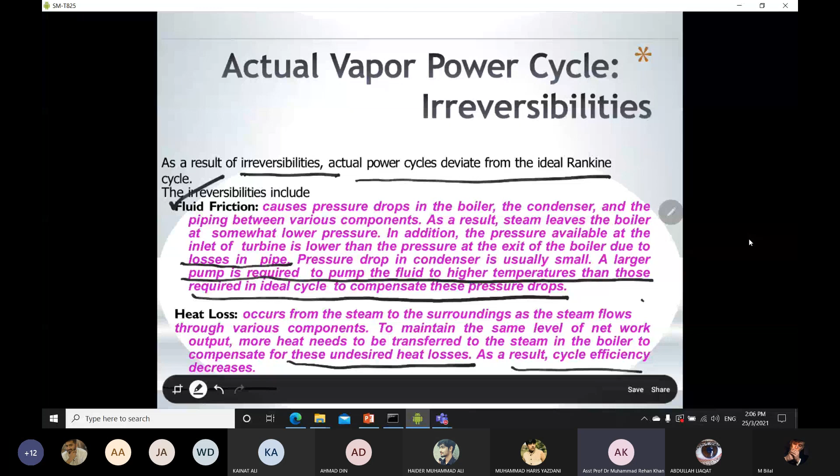Then there will be heat loss, occurring from the steam to the surroundings. Definitely if there is heat transfer, there will be losses to the surroundings for the actual system through various components. To maintain the same level of net work output, more heat needs to be transferred to the steam in the boiler to compensate for these undesired heat losses. As a result, cycle efficiency decreases. So for your actual vapor power cycle, the efficiency will be less compared to the ideal one.

Coming towards our T-S diagram for the actual one. Previously we know how the ideal case looks, I will draw it in blue line. For the actual one, notice this line, the continuous line, this is your actual one. So the actual vapor power cycle looks like this, as we already saw in previous lectures.

This is your ideal Rankine cycle, highlighted in blue. In your actual vapor power cycle, there will be a deviation from point 1 to 2, an increase in entropy, because this point, which was previously at 2, just shifted towards the right side. Then there will be a pressure drop in the boiler, so this point on the continuous line will be shifted from this to this dotted area, which represents your pressure drop.

Because there will be a decrease in pressure in the boiler, there will also be irreversibility in the turbine, so again there will be an increase in entropy value. The point which was previously at this state in the ideal case is now shifted towards 4 dash, so you can call it 4 dash. This is due to the irreversibility in the turbine, and that increase in entropy will always be seen at the exit of your turbine or exit of your pump. That's why point 3 does not change in either the ideal or the actual case.

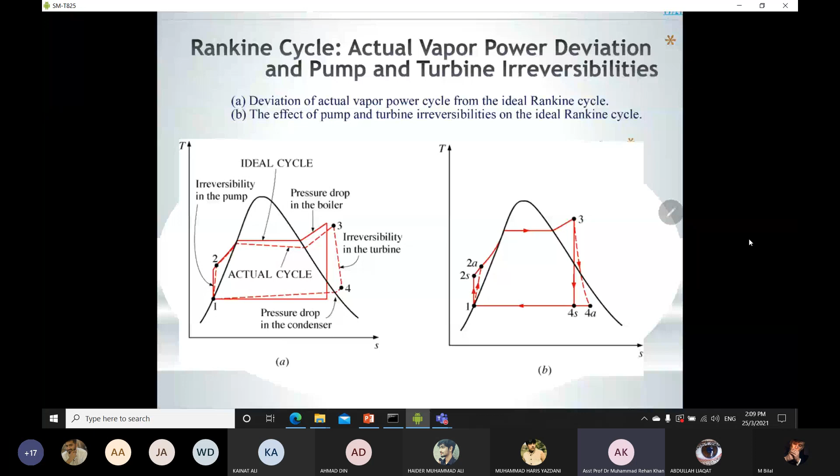Now coming towards this, we already talked about that there are two causes, which are your fluid friction or heat losses to surrounding, as the two common sources of irreversibilities in your actual turbine, actual vapor power cycle.

Now coming towards this, whenever there is an involvement of irreversibilities, these are to be seen in your pump, where you are supplying some work, and in your turbine as well. So whenever these things are involved, you have to define some efficiency of your pump in terms of your isentropic work. You already know we have to divide isentropic work over actual work.

So this term will be, because in the case of your pump, this is pump one, ws is lower. Because when there is an isentropic process, it means you have to supply minimum work to your pump. But when there is actual work, because of irreversibility, you have to supply maximum work to your pump. So the above term is lower, and the denominator term is the maximum one.

You already know that work is defined as enthalpy at exit minus enthalpy at inlet. So h2s, this is the isentropic one, h2s minus h1. And then actual work, one is your inlet, 2a is your exit, so h2a minus h1, this term will be defined.

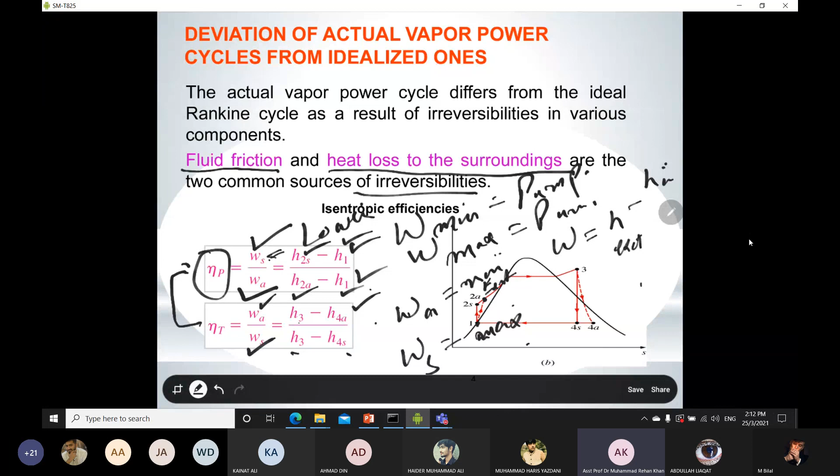So in order to define the work done in the form of enthalpies, again you have to know from your energy analysis in the previous lecture that h3 minus h4a. This term will be defined for the actual one, and then h3 minus h4s is the isentropic one, work done for your isentropic turbine. So this is how we can define the isentropic efficiency of your pump and turbine for your actual vapor power cycle.

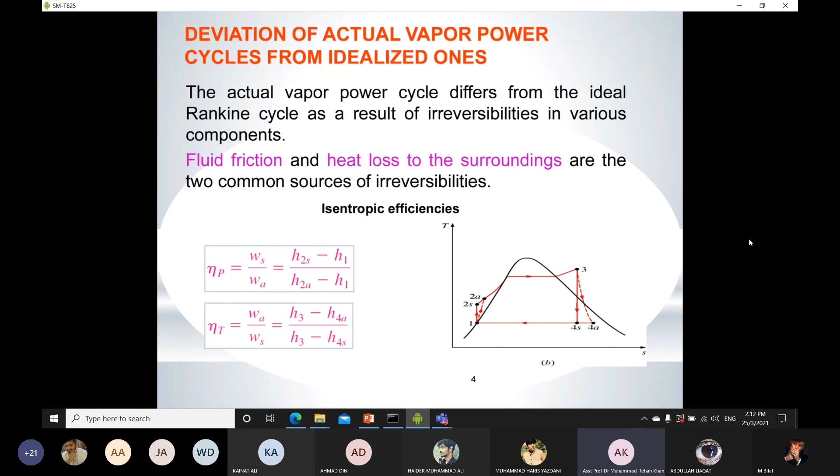So we will practice one question as well, so then you can easily understand how to apply these equations on your vapor power cycle, which is working on the actual one. Now coming towards the question.

Okay, let's read the question. Consider a 210 megawatt steam power plant that operates on a non-ideal Rankine cycle. This means it's defined as non-ideal, so this is the actual vapor power cycle. Steam enters a turbine at 10 megapascal and 500 degrees Celsius.

This means point number three is known to you: pressure is 10 megapascal and temperature is 500 degrees Celsius, and it is cooled in the condenser at a pressure of 10 kilopascal. This pressure is known to you as well, that is 10 kilopascal.

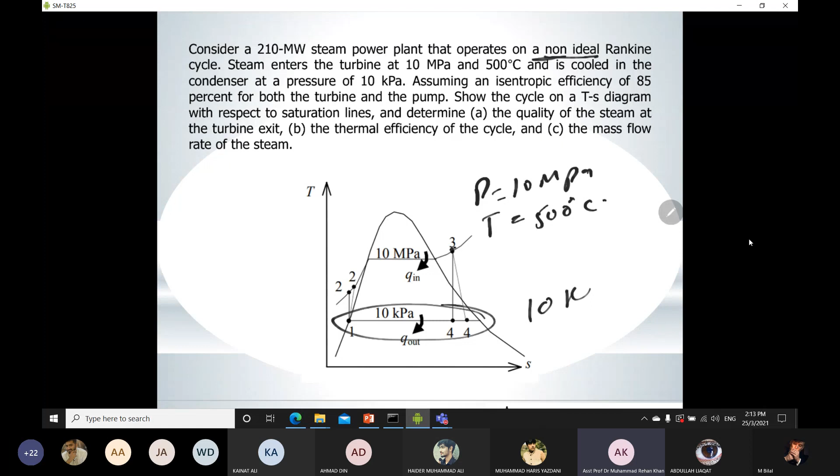Assuming an isentropic efficiency of 85% for both the turbine and the pump, the isentropic efficiency of the pump is given to you, and the isentropic efficiency of turbine is also given because it is mentioned as the same. So both are 85%, as mentioned in the question.

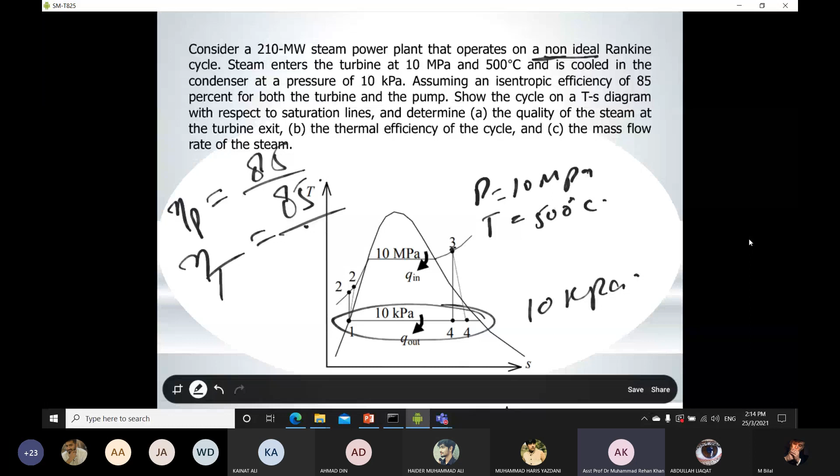Show the cycle on the TS diagram - it is already shown. And determine the quality of the steam at the turbine exit, the thermal efficiency of the cycle, and the mass flow rate of the steam. Now we will see how we can solve it.

Starting from state one, we already know that the pressure is 10 kilopascal, so we can go to the thermodynamics table. I hope all of you know how to find these values using the thermodynamics table, so I'm not going to repeat it. This will be from your saturated liquid one.

For W pump in, the difference from the previous question is that here you have to find the actual work for your pump, whereas previously you found the isentropic work. The equation is the same, specific volume into P2 minus P1, but here you have to divide by the isentropic efficiency of your pump.

This specific volume value comes from your state one. This is given in your question, this is given in your question, and this is also given. So by just plugging in all the values you can find the actual work for your pump, whereas previously we were finding the isentropic work.

Now we have to find the actual enthalpy at the state number - since this is 2s and this is 2a, we define this as 2a, h2a. So h2a is equal to h1 plus the actual pump work.

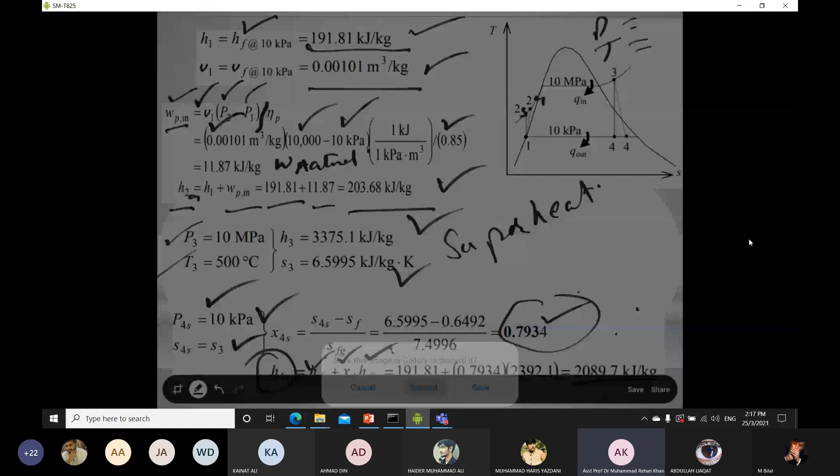Now coming toward H4A - how do we find this? We have to find both 4A and 4S. 4A we find from the isentropic efficiency of the turbine, given by the relation H3 minus H4 actual, divided by H3 minus H4S. H4A we have to find, H3 we already found previously.

H3 is given in your question, which you already found from the previous state. H4S you just found in the previous condition for the isentropic one. Now all values are given, so just plug them in and you will get the actual enthalpy value for state number 4.

Now coming towards the quality - for the quality again you have to use state number 4, but here you have to use the actual enthalpy value.

Okay, so again use this H4 which is your actual one. HF you can easily find out from your 10 kilopascal range. HFG is also given from your 10 kilopascal from your pressure table. So you can find the quality of your

steam here. Now coming towards the efficiency, we already know we need Q in, Q out. For Q in, H3 minus H2. Here H2, previously when we are dealing with the ideal one, we have to use H2S, which is your isentropic enthalpy.

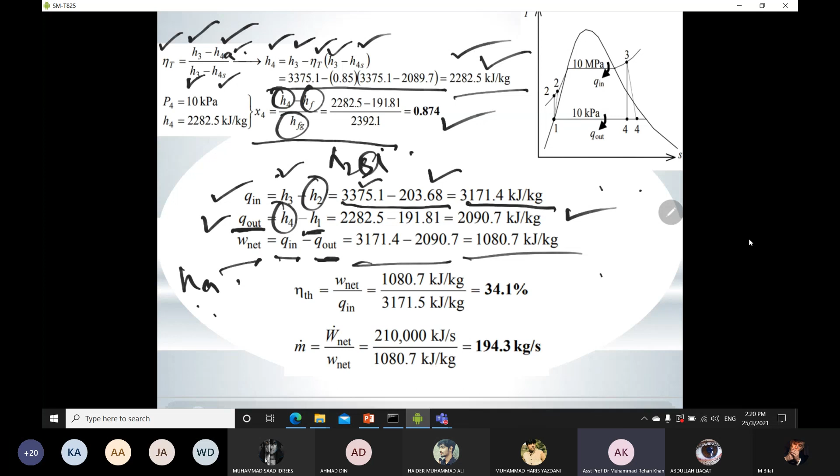Now we need W net, which is your W for your cycle. Put in all the values and then you can find the W net as well. Efficiency of the turbine, efficiency of your whole cycle is given by W net over Q in. Plug in all the values, you can easily find the efficiency as you have already done in your ideal case by using the same procedure.

Again you need a mass flow rate. This is your power which is given in your question, that it is a 210 megawatt power plant. And W net you already found in this area. Then you can easily find the mass flow rate as well. So this is how you can deal with your actual vapor power cycle by using your actual enthalpies and your isentropic enthalpy values.

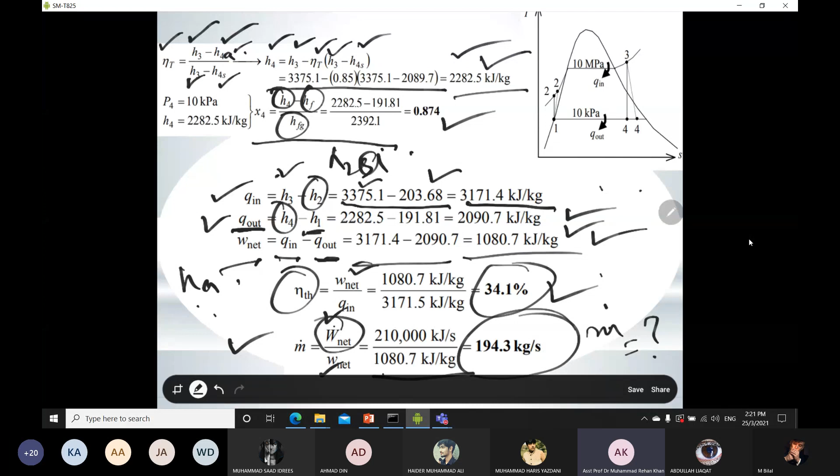Okay, so now coming towards the next question. This is example 10-2. If you can read it: a steam power plant operates on the cycle which is shown in figure 10-5, which is available in your book.

If the isentropic efficiency, here again the same thing which one student is asking before, that the isentropic efficiency of the turbine and the isentropic efficiency of the pump in this case is different, so we have to put two different values. Previously we were just mentioning that it was same in the problem statement, so we used the same value. In this case we have to use different values for each.

So first thing, the thermal efficiency of the cycle, again using the same procedure, the net power output of the plant for a mass flow rate of 15 kilogram per second. This is your reading assignment, you have to do by yourself after the class or anytime when you are free. So you have to read it by yourself.

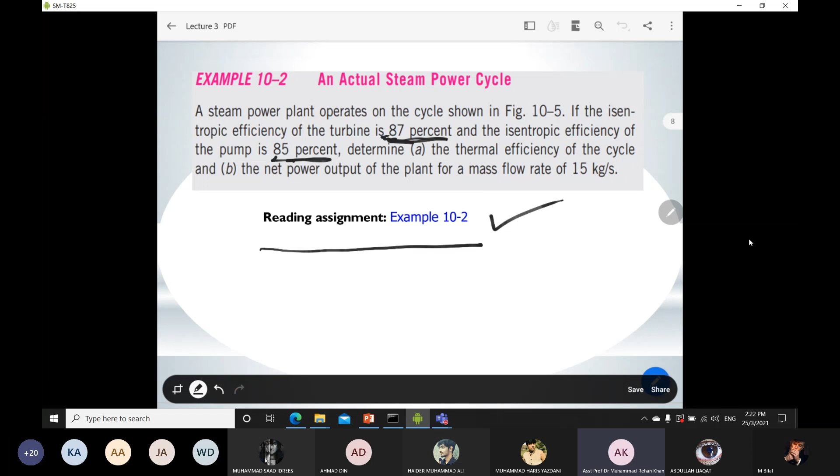Coming towards another important topic, because the main objective of this course is to increase the efficiency of your thermodynamic cycle. All the effort we are doing to find the enthalpies, to convert the actual vapor power cycle into the ideal one, is happening because we need maximum efficiency or maximum work output from our turbine. So we will see how we can achieve the maximum work from your turbine and how we can increase the efficiency by different ways.

As we already know, when we are talking about the TS diagram, the work for your cycle is this area under the curve. So in order to increase the work output for your cycle, W cycle, what we need to do is increase this area.

How can we increase this area? If we notice that this point 2 or this point 3, we just shift this point to the lower side, in this way we get this added area. This W added, which is your added area, increases the work done for your cycle. So this is one approach: either we can decrease the pressure of your condenser, and easily get the maximum work for your cycle.

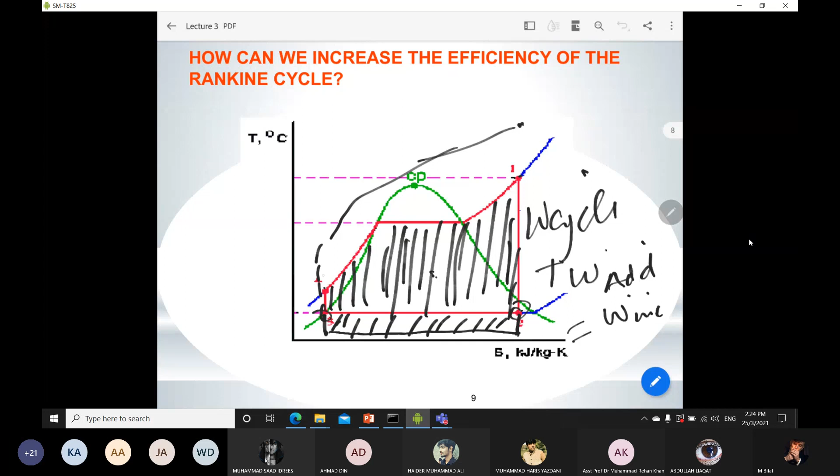Then the second approach is that either we can just shift this point one to this area. This again you can easily get some added part. So this is another approach. We will see in detail how these approaches will work.

The idea behind all the modifications to increase the thermal efficiency of the power cycle is the same: to increase the average temperature at which heat is transferred to the working fluid in the boiler, or decrease the average temperature at which heat is rejected from the working fluid in the condenser.

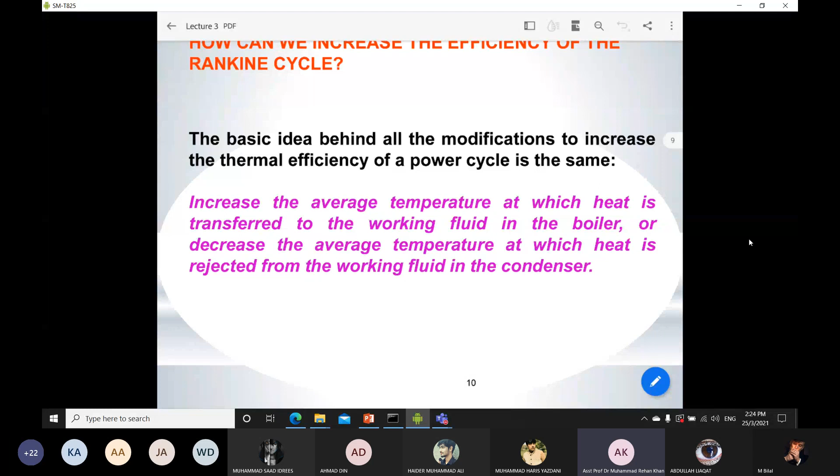Now the first approach, lowering the condenser pressure, which we already discussed, is that we need to increase the area under the curve. Previously, if this is your W cycle, now we just have to add to it by lowering this point 4 to 4 dash. Once we decrease this pressure, which is your condenser pressure, we get this added area.

So to take advantage of the increased efficiency at lower pressure, the condenser of the steam power plant usually operates well below the atmospheric pressure. There is a lower limit to this pressure depending on the temperature of the cooling medium.

But there is a side effect to this: because at the same time we are getting maximum work for our cycle, lowering the condenser pressure increases the moisture content, which is not desirable for our turbine. Once the moisture content is increased at the exit of the turbine, it means erosion and corrosion will be maximum, and we do not want our turbine lifespan affected by increasing moisture content. So this is not a desirable thing, we will see another way.

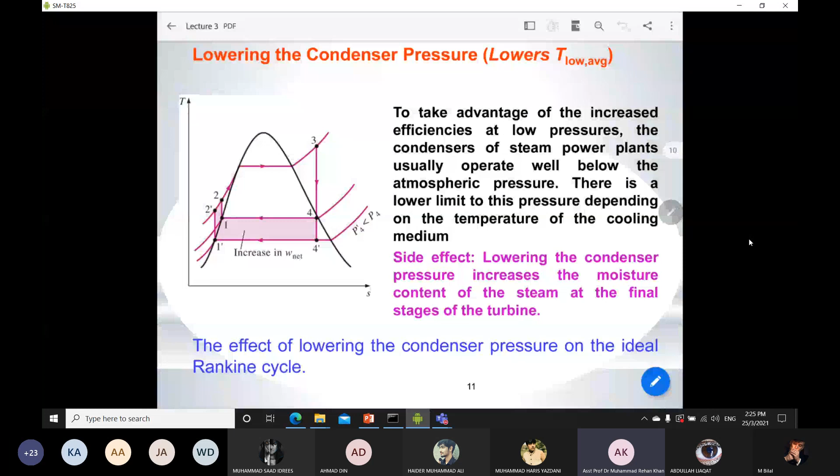The next way is superheating the steam to high temperature. First we will see what is meant by superheating of the steam.

Superheating means that previously this is your superheated region, previously the superheating is at point 3. Now we just shift to 3 dash, meaning we are superheating the steam at higher pressure and higher temperature. So now this will be the added area, and this is your W cycle previous one, and this is your W added. It means your cycle efficiency will be increased, because we have to add this up.

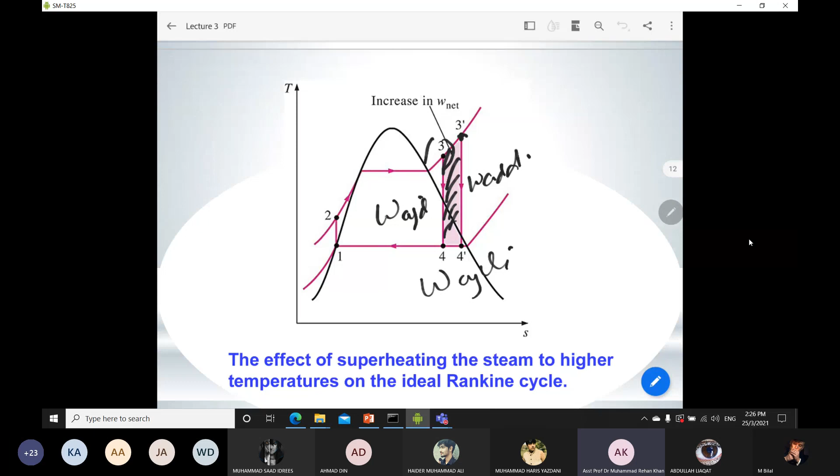Now coming towards another point: both the net work and heat input increase as a result of superheating the steam to a higher temperature. In turn, the overall effect is an increase in thermal efficiency, since the average temperature at which heat is added increases.

Also, superheating to a higher temperature decreases the moisture content of the steam at the turbine exit, which is desirable. So this is the positive thing about superheating.

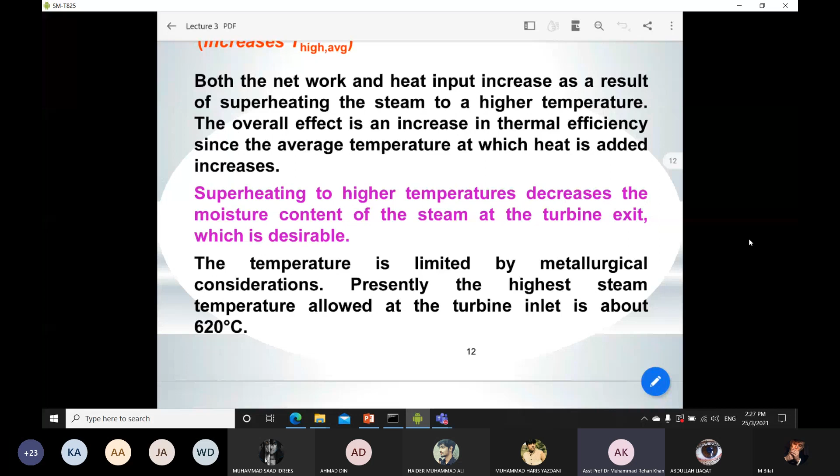Another thing is that temperature is limited by metallurgical considerations, because for example our turbine blade is made up of some sort of metal which cannot withstand that superheating temperature. So that's why we have to consider the metallurgical approach as well. Presently, the highest steam temperature allowed at the turbine inlet is about 620 degrees Celsius.

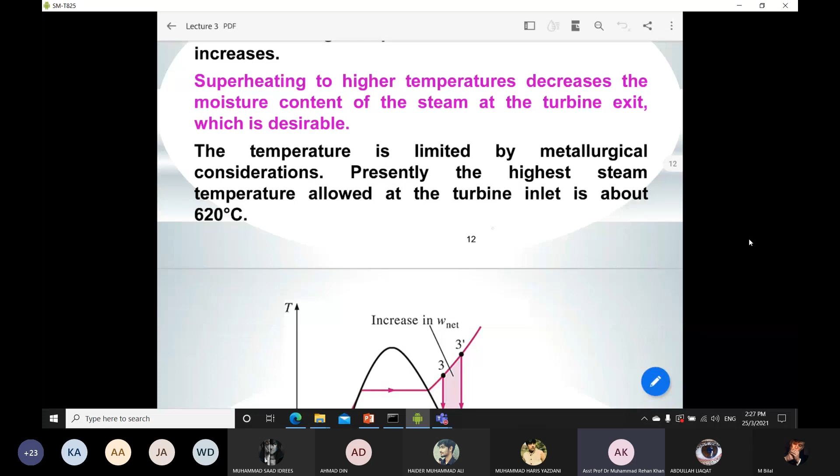So these are the operating temperatures for our turbine which we presently use in our steam power plants.

Now coming towards the third approach, which is increasing the boiler pressure. If we increase the boiler pressure, another important thing is that T maximum, which is your superheating temperature, we have to keep the same. So T maximum stays the same, but when we increase the boiler pressure, it means the boiling point of your working fluid is also increased, so we need more work input and more heat Q in the boiler.

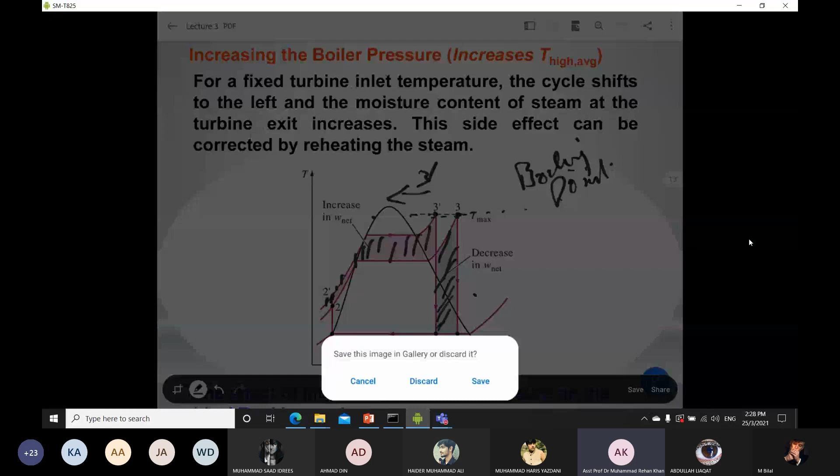So in this way, what we have to do is we get this added area by increasing the boiler pressure, but at the same time point 3, which was previously at the right side, now shifts towards the left, to point 3 dash. This means we see a decrease in W net, but this decrease is small compared to the increase, so we still get the maximum efficiency out of it. This is another approach to get maximum efficiency or maximum power from the cycle.

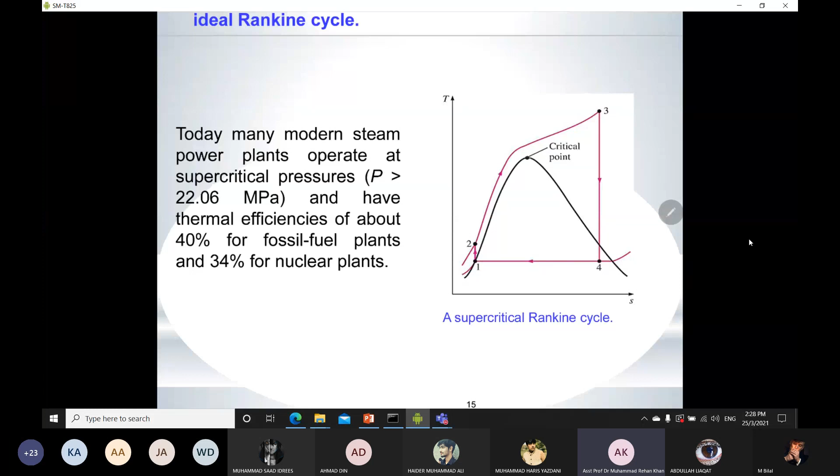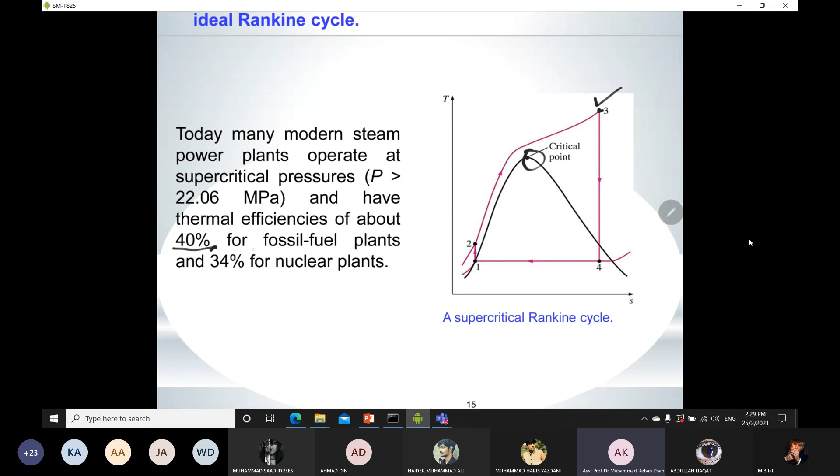Now coming to another point: many steam power plants today operate at supercritical pressure. Supercritical pressure means operating above this critical point. So today, in the operation of vapor power cycles, we use the supercritical pressure, meaning point 3 is above this critical point, at a value of 22.06 megapascal, giving a thermal efficiency of 40% for fossil fuel plants and 34% for nuclear plants. This is another important piece of information for you.

Now coming towards the question, we just apply these approaches. There were three approaches: either we increase the boiler pressure, decrease the condenser pressure, or use superheated steam by increasing the temperature of the superheating steam. So let's see how each affects the thermal efficiency.

Let's read the question first. Consider a steam power plant operating on the ideal Rankine cycle. Steam enters the turbine at 3 megapascal and 350 degrees Celsius, and is condensed in the condenser at a pressure of 10 kilopascal. So this pressure and this temperature are known to us. This is similar to your example 10-1, so we also have to compare the efficiency values from example 10-1, because in that example it was 75 kilopascal, while here it is 10 kilopascal. This means we are lowering the condenser pressure in this case.

So we will see, if we compare the efficiency, whether it is similar, higher, or lower with this approach. Let's see what happens. So, determine the thermal efficiency of this power plant.

For case A, you have to find the thermal efficiency. For case B, find the thermal efficiency if the steam is superheated to 600 degrees Celsius. Previously we were superheating the steam at 350 degrees Celsius, and now we have to raise the temperature to 600 degrees Celsius.

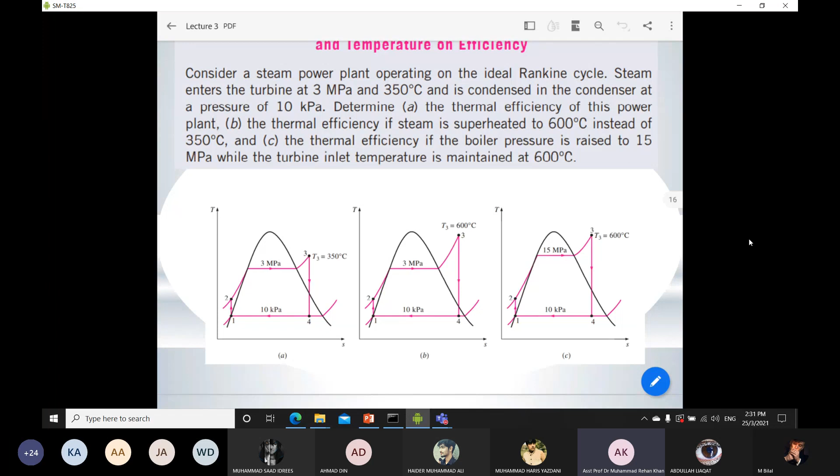Okay, so now we will see the solution.

Okay, so for state 1, which is your first case, you already know the pressure at state 1, which is similar to your condenser pressure, which is 10 kilopascal. And we already know how to find the enthalpy and specific volume for state number 1.

Just go to the thermodynamic table and you can easily find the enthalpy value at the saturated liquid part, and the specific volume for your saturated liquid case. This comes from your thermodynamic tables, so just read it from there. 191 we already found in example 10-1 as well.

So coming towards state number 2, this is 3 megapascal. This is given in your question that your boiler pressure will be 3 megapascal. As we already know that the entropy S2 is equal to S1, we can easily find your pump work from there, which is specific volume into P2 minus P1.

Specific volume comes from state number 1, which you already found from the thermodynamic table. P2 is given in your question, and P1 is also given in your question.

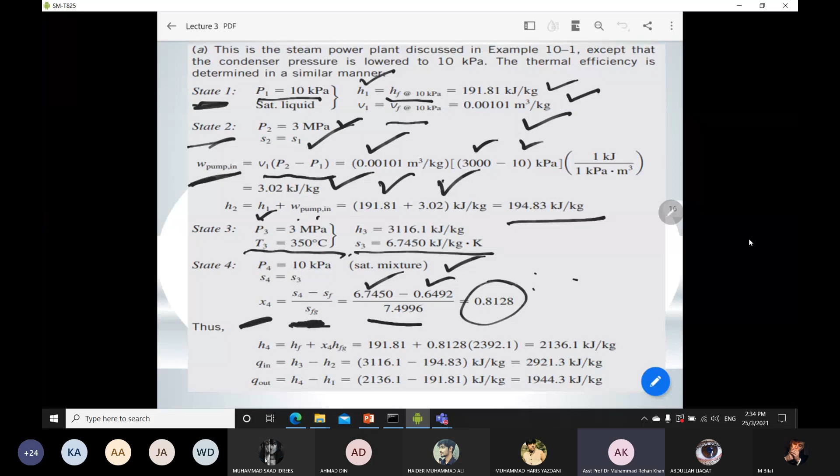So enthalpy for point 4 you can again find from the thermodynamics table. This comes from the thermodynamic table, and X4, which you already found in the previous case, you can also find from the thermodynamics table.

Once all the values are known, you can easily find Q in and Q out. You just need H3 minus H2 for Q in, and H4 minus H1 for Q out, which come from your energy balance equation, already discussed in the previous lecture.

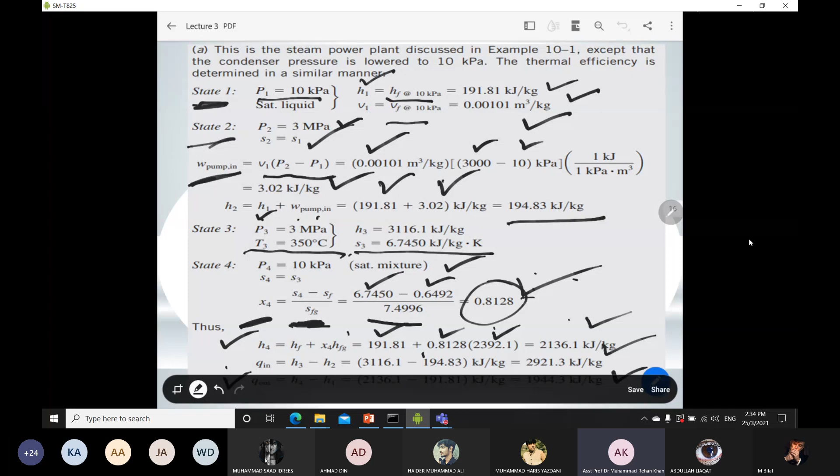Now the main point is the effect on thermal efficiency, because we already know that thermal efficiency is 1 minus Q out over Q in. You can easily find Q out from this relation and Q in from this relation, so the thermal efficiency becomes 33.4%.

So if we compare from example 10-1, the thermal efficiency there was 26.0% for your condenser pressure P4 equal to 75 kilopascal case. Now your thermal efficiency becomes 33.4%. Therefore you can easily see there will be an increase in thermal efficiency by just lowering the condenser pressure.

This is because, as we already discussed, if we decrease the condenser pressure, it means the area under the curve will increase. Once that area under the curve increases, it turns out to be an increase in thermal efficiency, and your cycle work also increases.

At the same time, by decreasing the pressure at the condenser, the quality of the steam decreases from 88.6% to 81.3%. This means the moisture content increases from 11.4% to 18.7%. This is not desirable, since we do not want the moisture content to increase. So this is a negative effect of decreasing the pressure in the condenser, and we have to avoid it.

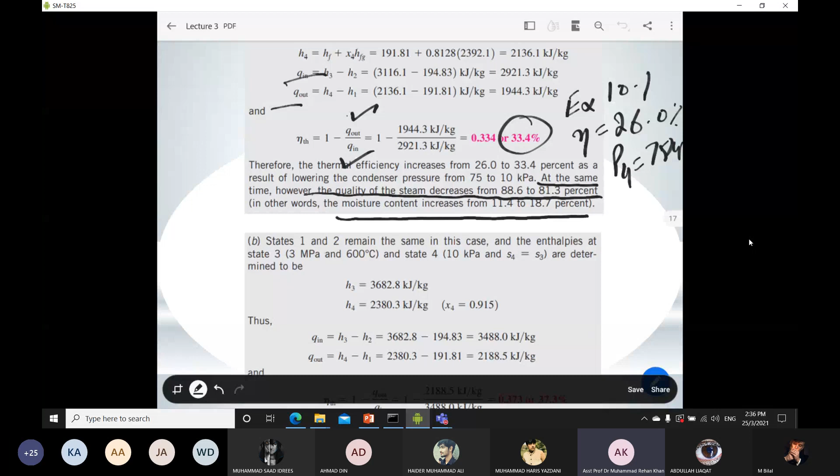Coming towards the second part: previously the superheating temperature, T3, was 350 degrees Celsius. Now we increase T3 to 600 degrees Celsius for case B, and we will see what the effect is.

So again, the approach is the same. You have to find the enthalpy value at H3 and H4, because H1 and H2 are similar to your previous case, which you already found in part A. So you have to find Q in and Q out, and then plug in all the values to get the thermal efficiency of 37.3%.

Okay, so now just compare with the previous thermal efficiency. Previously you get 33.4% in part A, now you get 37.3% in part B. So if we just compare, we will again see there will be an increase in thermal efficiency, but that increase is not so much high.

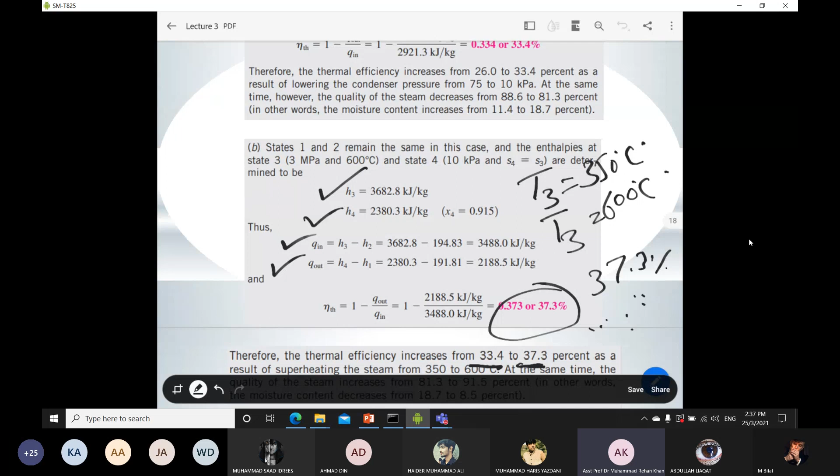But again, the issue is that at the same time, the quality of the steam increases from 81.3 to 91.5%. In other words, the moisture content decreases, and decrease in moisture content is desirable for the turbine as well, because we get minimum erosion and corrosion effect. So that is desirable while designing the turbines as well. So this is the difference between increasing the superheating temperature.

So now coming towards point 3, which is part C. In part C, what we have done is we just have to increase the boiler pressure, which is 15 megapascal. Previously it was operating at 3 megapascal, so now we increase it to 15 megapascal.

So again, you have to find all the enthalpy values H2, H3, H4 by using the same approach we already found from the ideal Rankine cycle. So just plug in all the values, Q in and Q out, and now you have to plug in this equation, and you will get 43%.

So now we will just compare with case number B. In case B, it is 37.3%, and in this case, it is 43%. So there will be an increase in thermal efficiency by just increasing the boiler pressure to 15 megapascal.

This one is increasing your pressure in the boiler. So P3 we just increase from 3 megapascal to 15 megapascal, which is in case B. So we will get the increase in thermal efficiency. So again in this case, at the same time, the quality of the steam decreases from 91.5 to 80.4%.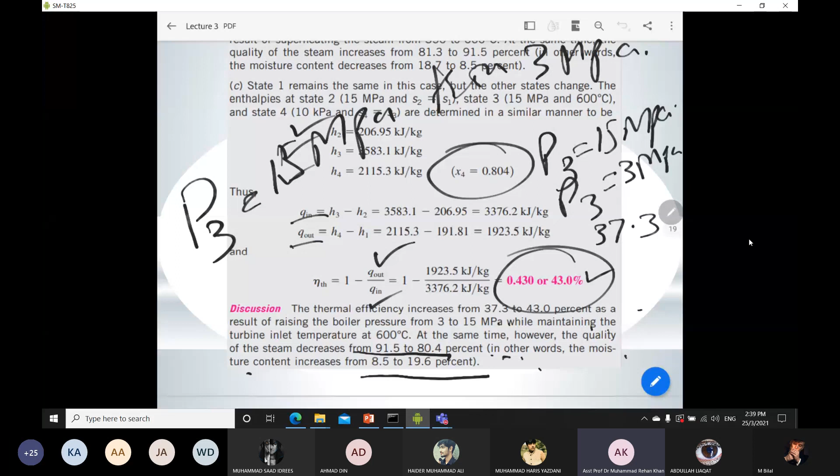So if we find the quality, we can easily compare with the previous cases. In other words, the moisture content increases from 8.5 to 19.6%. So this is again the moisture content increased, and this is not desirable for your turbine as well, because we do not want the turbine lifespan to be less due to erosion and corrosion.

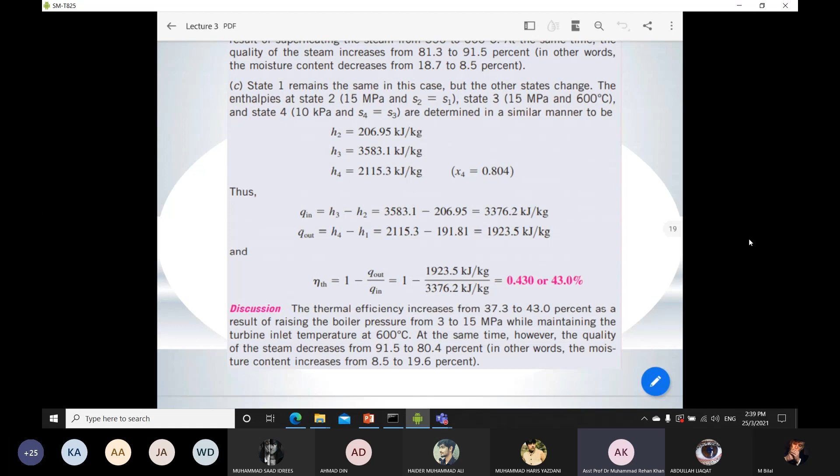So this is how we can see fluctuation in the thermal efficiency by just playing with the two parameters: superheated temperature, your boiler pressure, and your condenser pressure. Okay, so any question till this point?

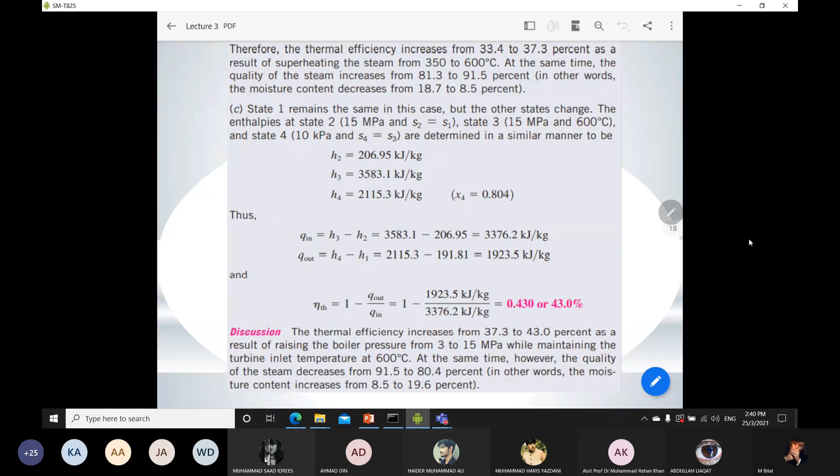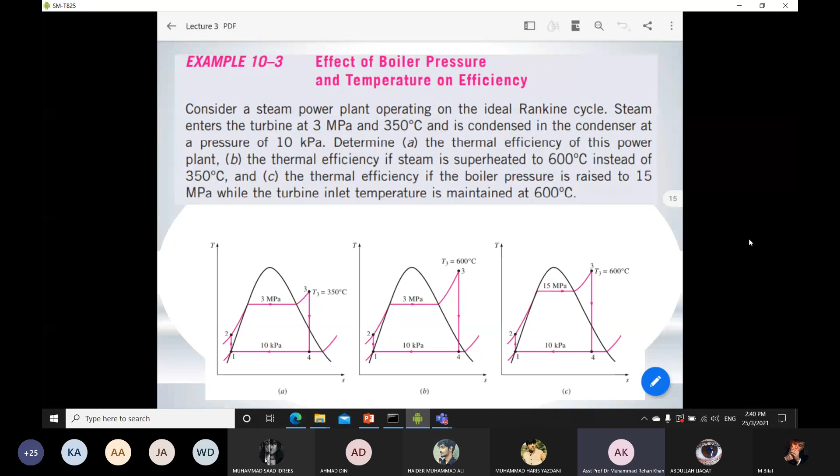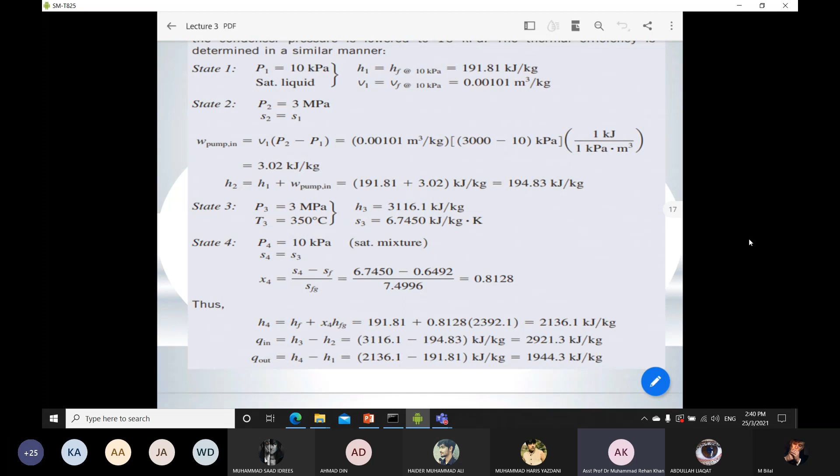No, sir. Okay, so I hope this will be a very easy one, but I will suggest that you have to practice all the questions which I already showed. Just go through these slides by yourself, because whenever we are going for the sessional exam, you will not see problems that are as easy as this. So you will have good knowledge about how to find the enthalpy and different pressure and temperature at different states. So that's why I will suggest you practice all the questions by yourself after the class as well.

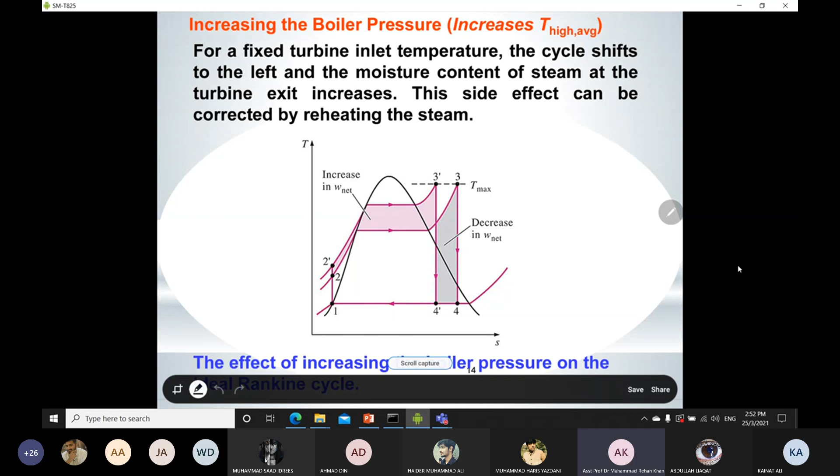Okay, so we already looked at how increasing the boiler pressure in this area will increase your thermal efficiency as compared to all the other cases which we already saw in example 10-3. But at the same time, one drawback of this is that by increasing the boiler pressure, you will get...

Can anybody confirm that you hear my voice? Yes, sir, you're audible.

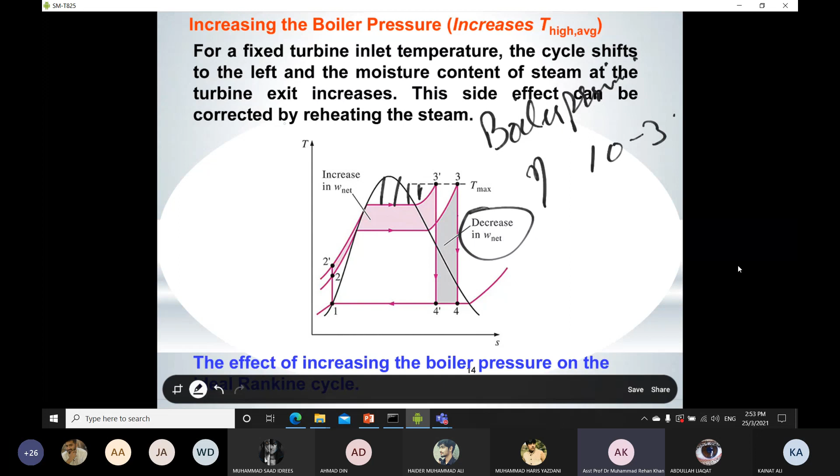Okay, so we do not want that decrease to happen. Previously the third case was producing maximum efficiency. So how do we deal with this situation, where instead of a decrease, we get something that will also be useful for increasing the efficiency? So we use the reheating of the steam. What is the reheating of the steam? We will see how reheating will work.

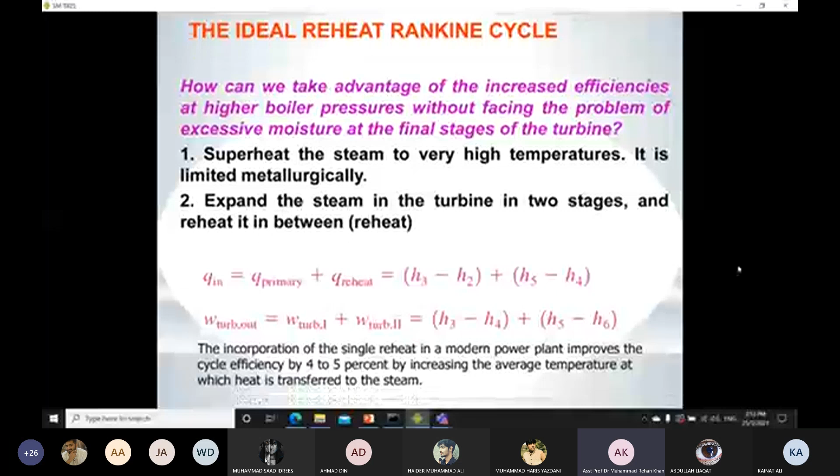So for the reheating, what we have to do is... this is also similar to your Rankine cycle. Again, the boiler is the same, pump is there, condenser is there.

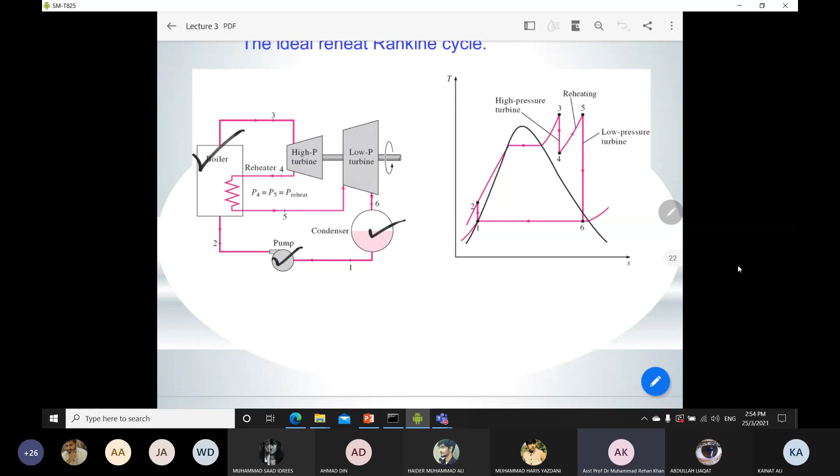Instead of using one turbine, as in the previous case, we are now using two turbines. One is the low pressure turbine and the other is the high pressure turbine. So what is the use of this?

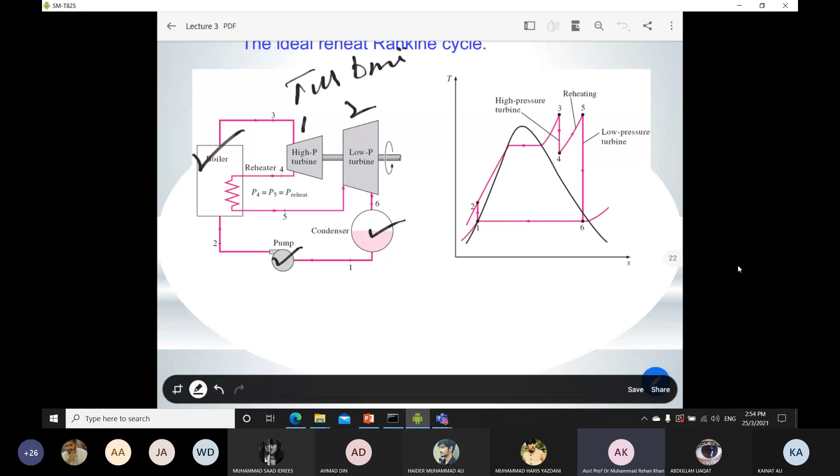Previously we used one heat addition process, but in this case we use two heat addition processes in the boiler. Between states 2 to 3, there is a heat addition to raise the temperature to the superheating region. Then using 4 to 5, we again superheat the steam, because as the steam comes to state 4, it decreases in temperature, so we add heat again to turn it back into superheated steam by raising the temperature.

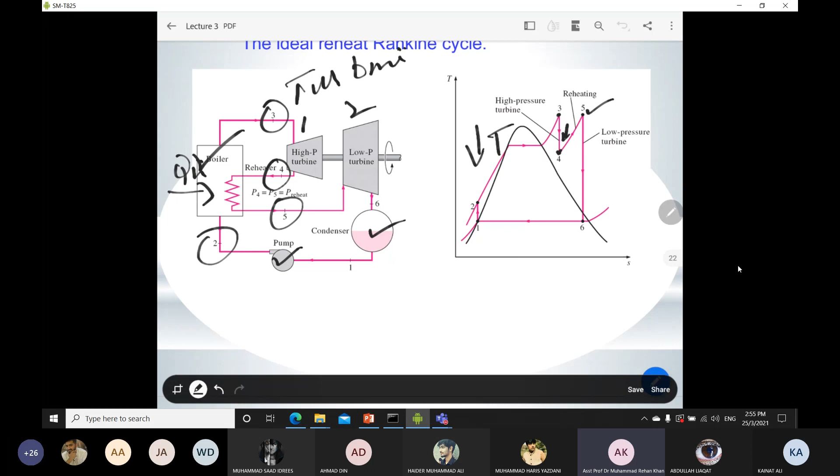So by just adding another turbine, the low pressure and high pressure turbine, we increase the area as well. Previously the decreasing portion is now also contributing to the area under the curve. This means the work of the cycle will increase and the efficiency of this cycle will also increase.

Now we will see how to take advantage of increased efficiency at higher boiler pressure without facing problems, such as superheating the steam to a very high temperature. There will be metallurgical issues for this because we mostly use steel or similar materials, and it's possible that the high temperature is not withstandable for this material. So that is another issue.

Another important thing is to expand the steam in the turbine in two stages. So we need to find Q in most cases for doing the thermodynamic analysis of this reheat vapor power cycle. We already know there will be two heat addition processes in this: Q primary and Q reheat. Q primary is what we already saw in the previous cases, and Q reheat is what we have added in this reheat cycle.

So doing the energy analysis: H3 minus H2, this is the exit, this is the inlet, and again H5 minus H4. You just have to add Q primary and Q reheat to get the total heat input.

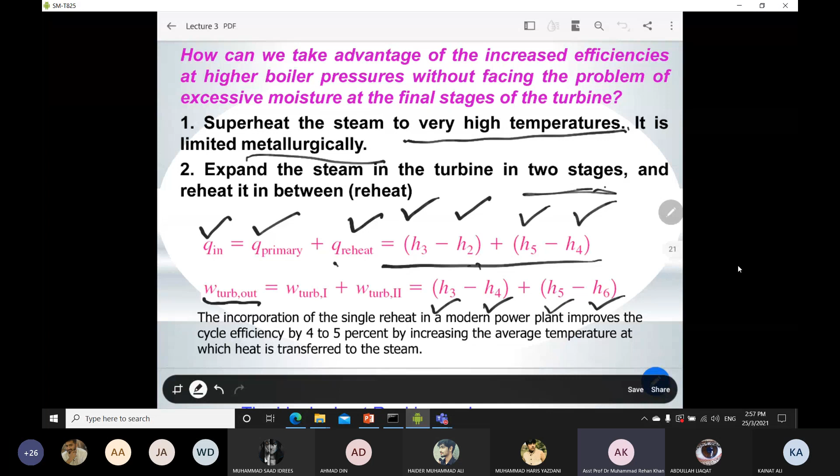Now for turbine output, in this case there are two turbines, so we have to add both the work of turbine 1 and turbine 2. By using this relation you just add up all the enthalpies to get the turbine output. Now let's look at some advantages and disadvantages of the reheating process.

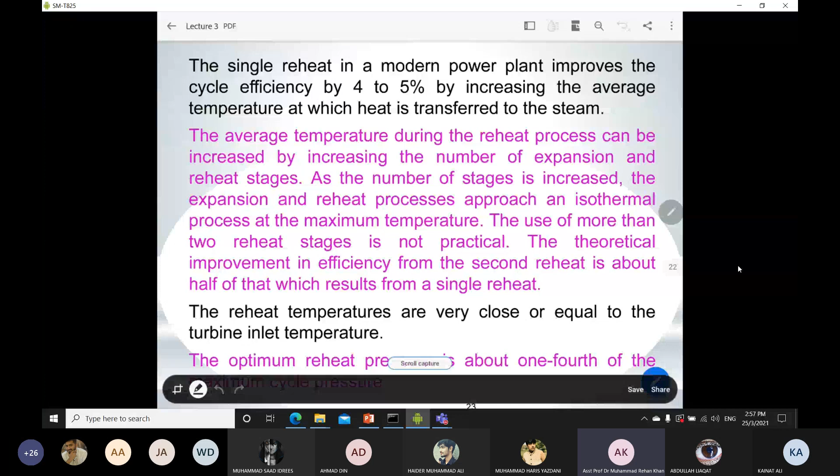A single reheat in modern power plants improves the cycle efficiency by 4 to 5% by increasing the average temperature at which heat is transferred to the steam. This means 4 to 5% of efficiency is increased by just adding one reheat process. The average temperature during the reheat process can be increased by increasing the number of expansion and reheat stages, which in turn increases the efficiency of the turbine and the whole stage.

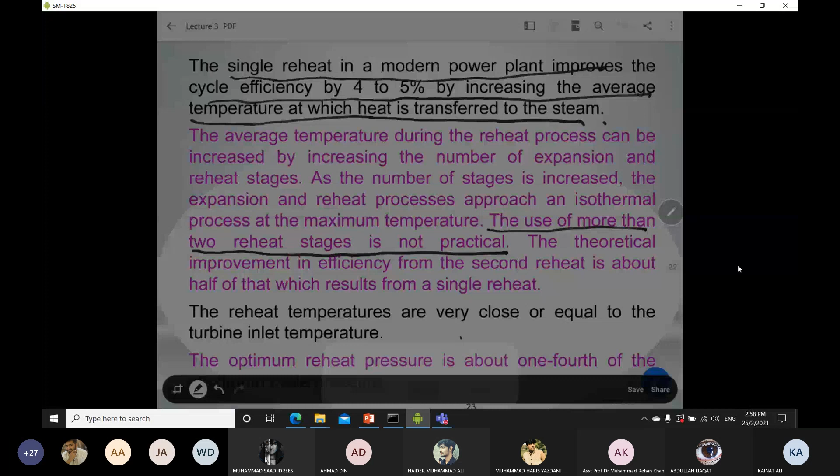However, the use of more than two reheat stages is not practical, because using more than two reheat stages means higher maintenance cost since you have to add more turbines in your vapor power cycle. That is not practical because cost is one of the most important issues while designing the vapor power cycle.

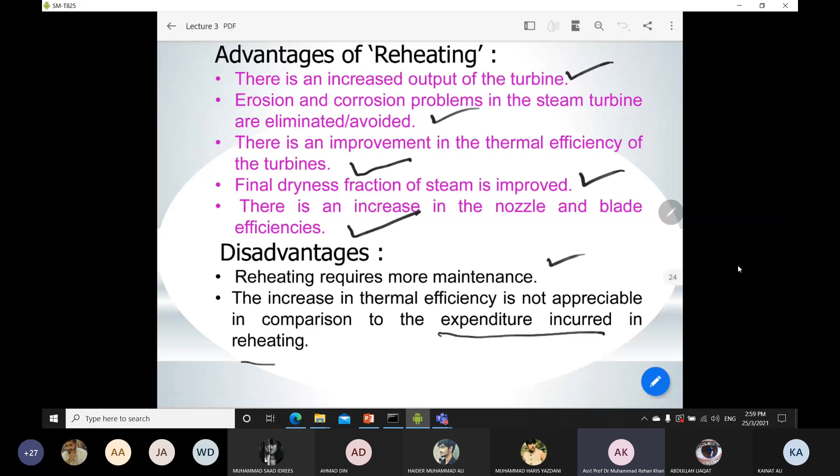Then there are disadvantages: reheating requires more maintenance, as we already discussed, since adding more turbines means higher maintenance cost, which we do not want. Also, the increase in thermal efficiency is not appreciable compared to the expenditure incurred in the reheating. That is another important thing we do not want, since the expenditure will be higher.

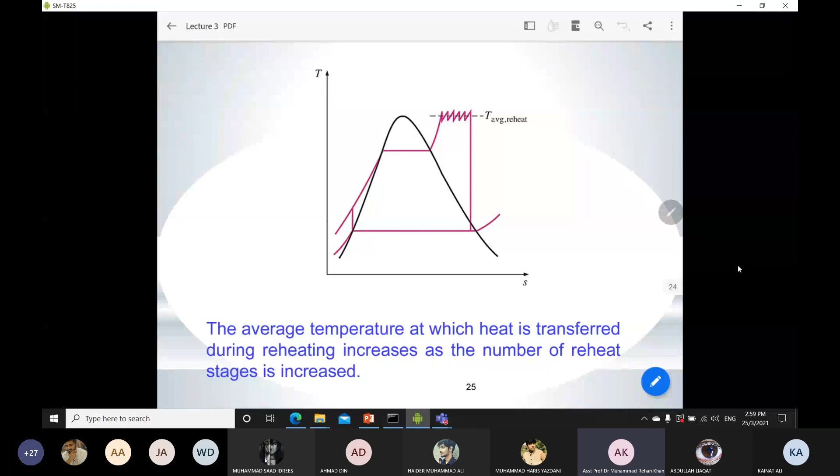Okay, so now if we add number of reheat stages, the average temperature at which heat is transferred during the reheating increases as the number of reheat stages is increased. So this is just information for you.

Now we will see an example. In this way, you will better understand what the reheating process is and how to thermodynamically analyze the reheating vapor power cycle. Another important thing is after this question you have to do one question by yourself, so listen carefully how to perform the thermodynamic approach so that we can find the enthalpy value at all the states, in order to find the thermal efficiency of this cycle. So you have to do one question after this.

So first read the question. Consider a steam power plant operating on the ideal reheat Rankine cycle, meaning this is the ideal case, but it will be a reheat Rankine cycle. Steam enters the high pressure turbine, so there will be two turbines. The high pressure turbine is between state 3 and 4. The pressure at state 3 is 15 megapascal and 600 degrees Celsius, and it is condensed in the condenser at a pressure of 10 kilopascal, meaning the condenser pressure is also given in the question. If the moisture content in the steam at the exit of the low pressure turbine, that is point number 6, the moisture content is not to exceed 10.4%, determine the pressure at which the steam should be reheated.

So we have to find P4 and P5 from this data. The thermal efficiency of the cycle we have to find out by finding all the values of enthalpies at all the states. Also, assume the steam is reheated to the inlet temperature of the high pressure turbine. This is again information we will use in solving this question.

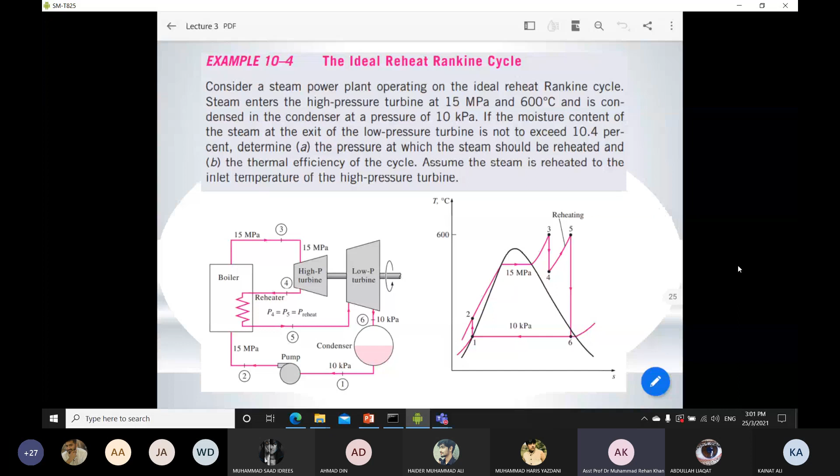So now coming towards the question. As we know, the pressure at the condenser is given to us in the question, so we have to find the enthalpy values at all the states.

So you have to start from state number 6. Previously we started from state number 1, but it depends on the question and the data available, on where we have to start, because if we start at P6 we can easily find the enthalpy values for the rest of the stages. So P6, the pressure is given in your question.

The moisture content at the exit of the low pressure turbine is given, so S6 you can find from the thermodynamics table. SF is your saturated liquid entropy value, also given in your question, and this you can also find from the thermodynamic table. Just plug in all the values and you will get the entropy value at point number 6. We also have to find the enthalpy value. For that, again using the same thermodynamics table for the pressure of 10 kilopascal, you can get all the values and plug them in to easily get the enthalpy value at state number 6 as well.

Now the question is how to find the pressure value at state number 5, because we have to find the pressure at that point. As already given in the question, T5 equals 600 degrees Celsius, and S5 equals S6 because it is an isentropic process. From this data we can easily find P5. As you already know, T5 is in the superheated region, so now we have to go to the superheated region table.

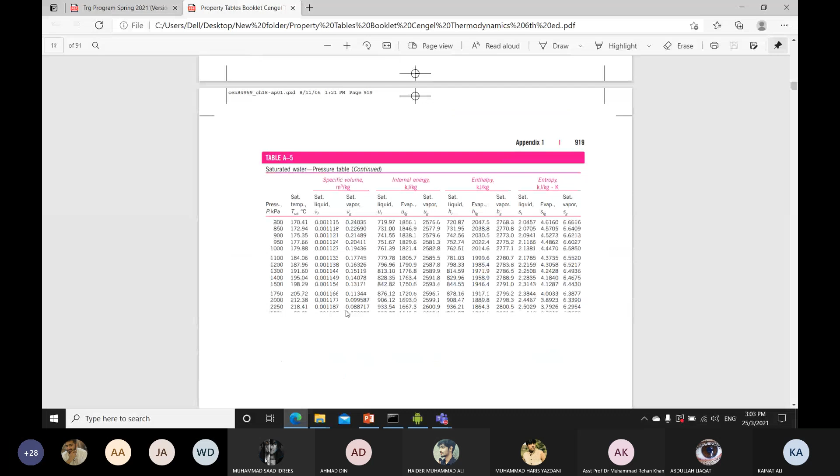Okay, so superheated region over. In this case, to find the pressure, we have to use trial and error method. What is the trial and error method? We have to just note down the entropy value at state number 5, which is 7.3688.

So if we have to find the value of the pressure, we just have to look on 600 degrees Celsius, which is mentioned in the question. Then we have to look at the entropy value because S5 is equal to S6. So you have to look at all the tables. If you notice at 600, the value is 10.16, which means it is very far from our S5 or S6 value. So we have to look through all the table. Whatever region where you find the value closer to 7.3688, you stop at that point.

For example, at 2.5 megapascal, at 600, it is 7.5979, so it's still higher. So you have to bring it down to 4 megapascal, and for 4 megapascal at 600 degrees Celsius, you get 7.3706. This value is closer to our value of 7.3688, so this value will be closer at 4 megapascal.

So you have to go through all the tables and compare your enthalpy entropy value, and whatever pressure range in which your entropy value is closer to this value, you note that down as your pressure at state number 5. So this is the trial and error process. You have to spend some time finding out the P5 range.

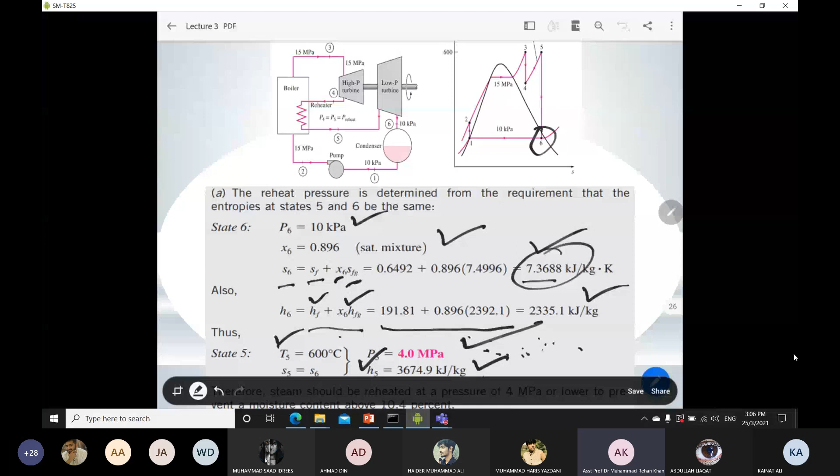So again you have to find the enthalpy value at state number 5 as well, following the same table. For example, at P4, 600 degrees Celsius, you note down the enthalpy value, which is 3674.9 at the superheated region. You can easily get this enthalpy value from the thermodynamics table. So this is how we find the properties at state number 5.

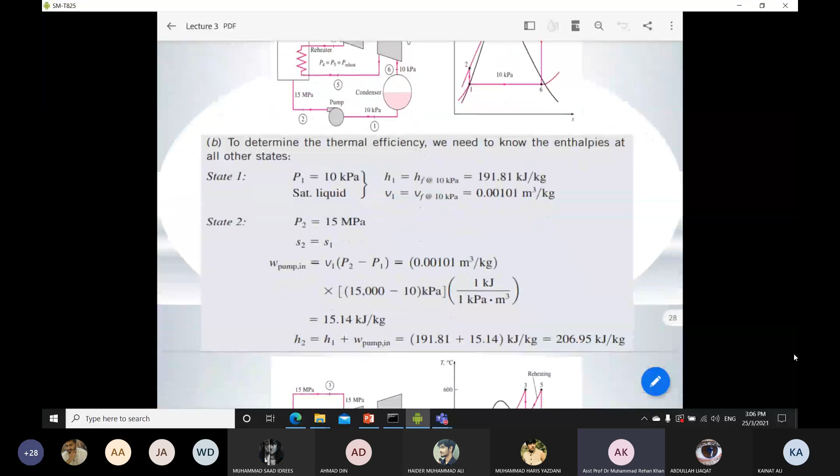Now coming to point B, to find the thermal efficiency, you already know that you have to find all the enthalpy values. So we start from state number 1. We already know that 10 kilopascal is given as the condenser pressure, and P6 is equal to P1. H1 and specific volume 1 you can easily find from the thermodynamics table, that would not be an issue.

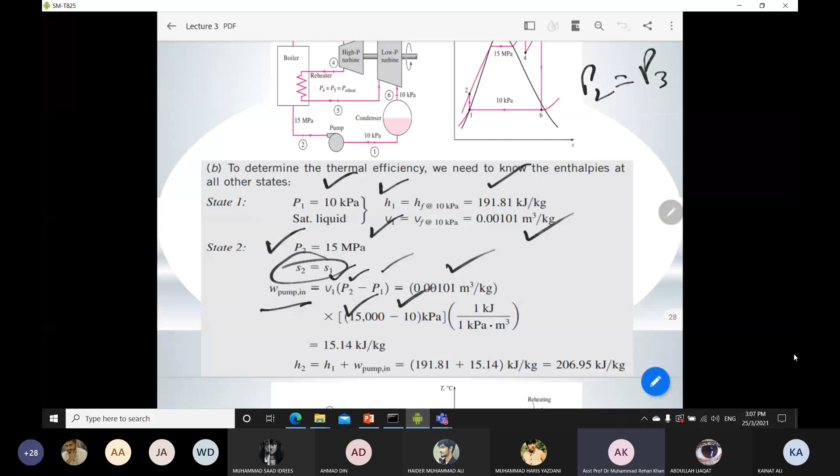So P2 is given such that P2 is equal to P3. P3 is given in the question, and P2 is known. S2 is equal to S1, which we already found from the previous state. So you can find the work supplied to your pump using specific volume times P2 minus P1. Specific volume is given in the question, and you can find the pump work. Same for the enthalpy: H1 plus W pump in, you can easily find the enthalpy value also.

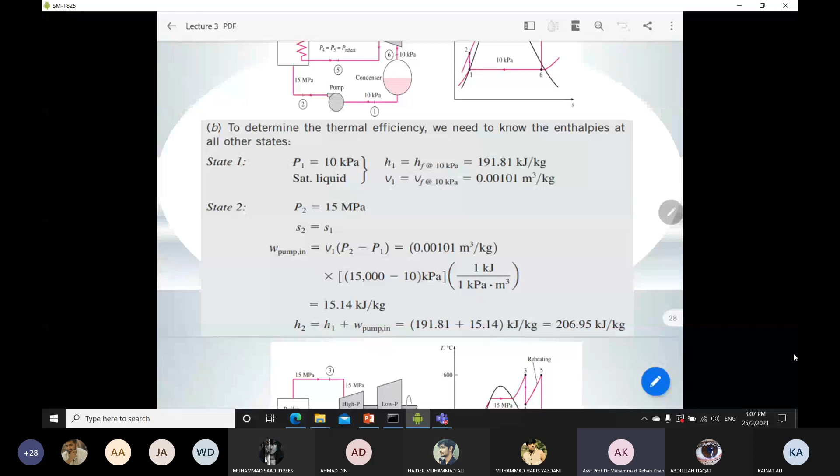Now coming to the next point, state number 3. At state number 3, your temperature and pressure for the steam are given, meaning it will be a superheated region. You can easily go to the superheated water table and find the enthalpy value at this state as well.

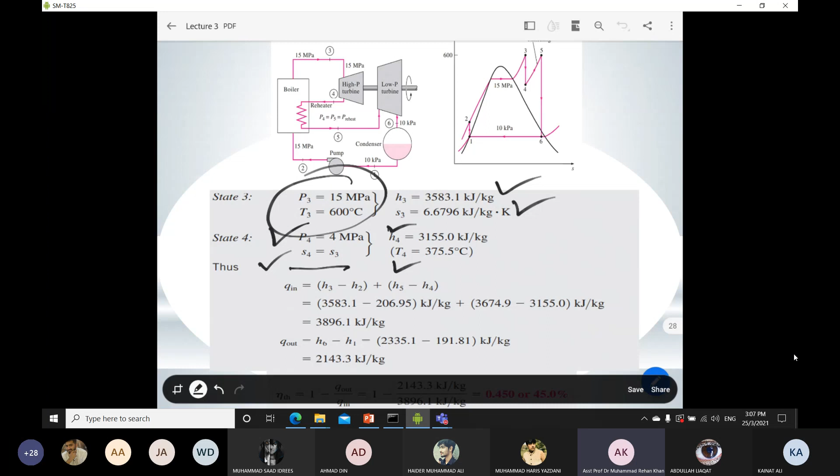Now the issue will be with state number 4, because at state number 4, the pressure is given and entropy is given, but the rest of the values we do not know how to find. We already know that S4 is equal to S3, so how do we find H4 and T4? This is not simple like the previous cases, where you just read from the table and mark H4 and T4. So what you have to do is bring some mathematical knowledge.

If you do not know how to do the linear interpolation, you can go and revise your mathematics. I think you already have been taught in the previous course how to do linear interpolation.

What we have to do is go to the thermodynamic table, because we already know that state number 4 is the superheated one, so we have to go to the superheated table, and we know that P4 is at 4 megapascal.

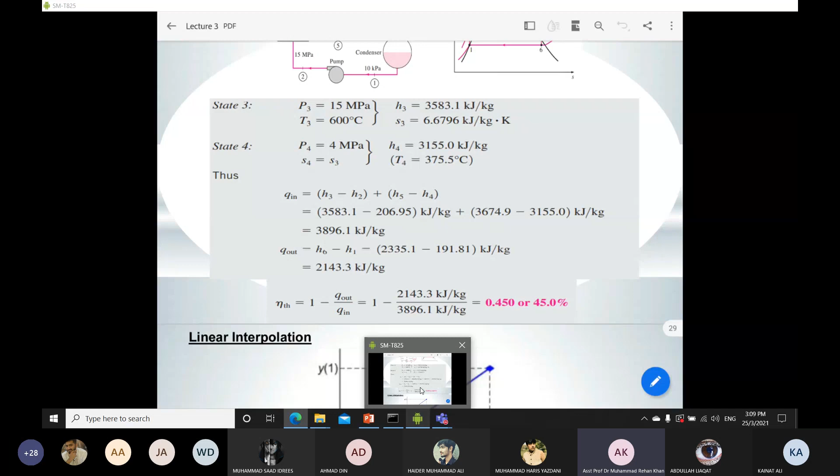You have to look down and see that between this region, 6.5843 and 6.7714, the value 6.6796 exists. Once you know the value is in between these two points, you have to apply linear interpolation between the 350 and 400 range, in order to find the enthalpy value and temperature value in between this range.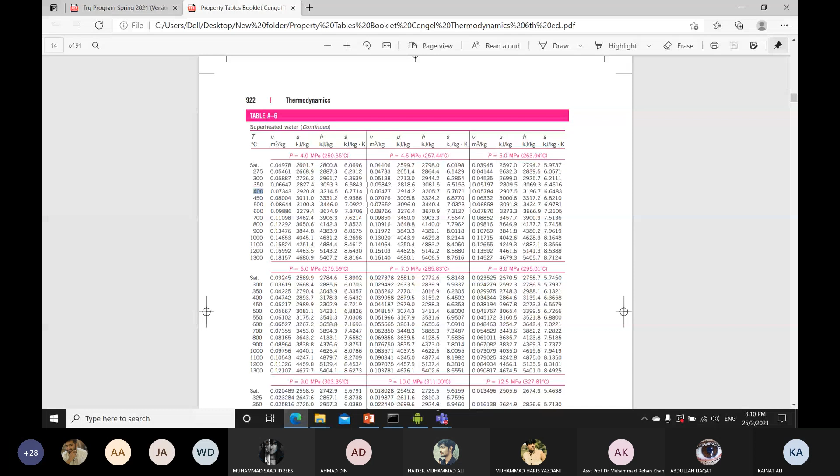Now you just have to note down all the values, because your temperature at state number 1, which is 350 degrees Celsius, comes from your thermodynamic table. For your superheated case, this temperature you have to find out.

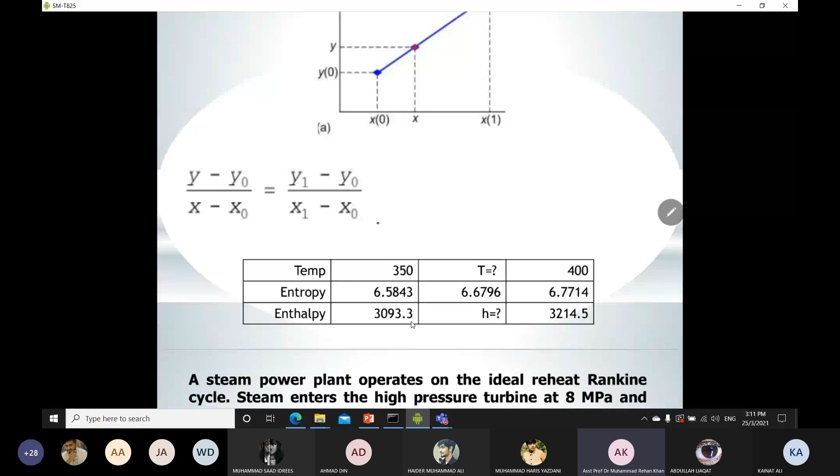This again comes from your thermodynamic table. The entropy value you just have to read, which is in line with 350 Celsius. This 6.6796 comes from S4 equal to S5, and S4 equal to S3. This comes from against the 400 degrees C temperature.

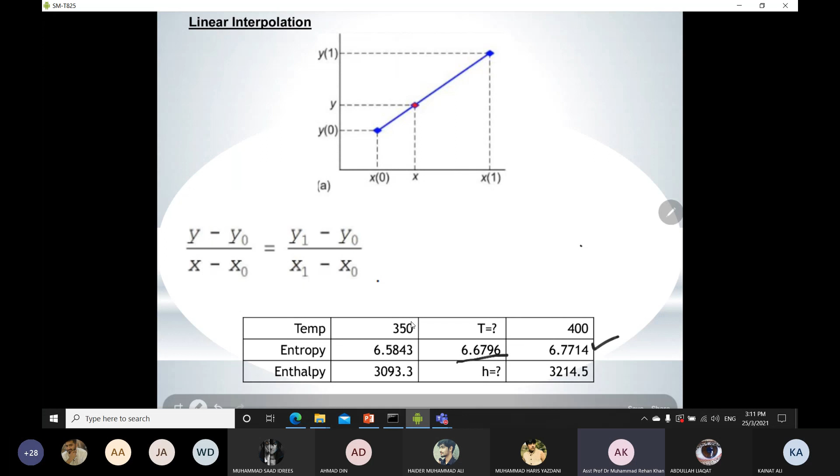Again, you have to note down all the enthalpy values against 350, which is 3093. It is mentioned in your thermodynamic table, and enthalpy at state number 4 you again have to find, which is 3214.5. This comes against your 400 degrees Celsius.

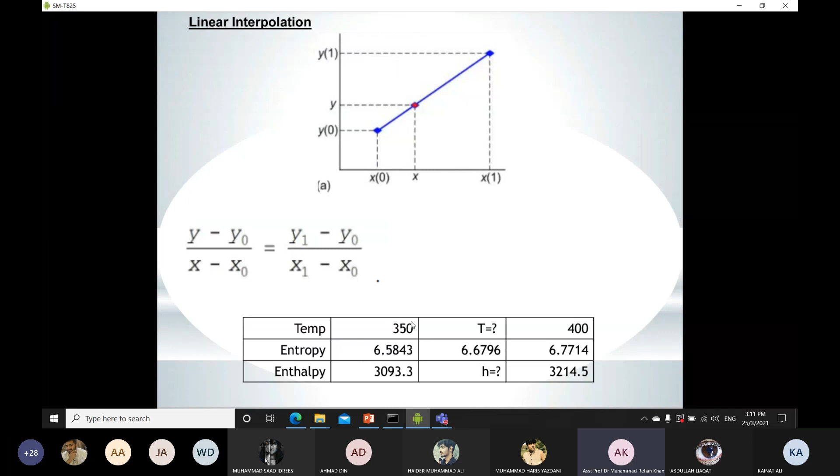Once all these values are known to you, you can plug them into this equation and easily find the temperature value and enthalpy value. So we will see that. I will just go quickly and do some calculation to find the values for temperature first.

So first we have to find the temperature for state number 4. So temperature minus 350, your y is in between, y naught meaning your 350 temperature, 6.6796. This is your linear interpolation method, which comes from your mathematical knowledge.

6.5843, which is equal to y1 minus y naught. So what is y1 in this? Y1 is 400, y naught is 350, divided by x1 minus x naught. So x1 is 6.7714 minus 6.5843. You can just solve for T and you will get the value of T.

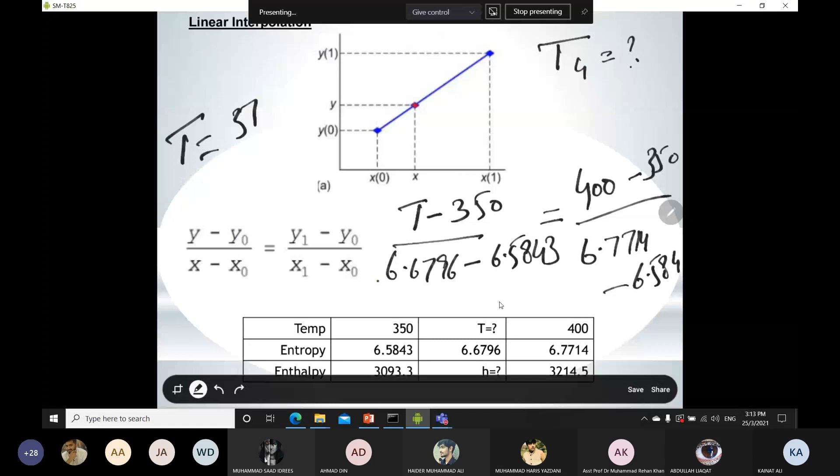So you can just notice that by doing the linear interpolation, you can find this value T4, which is equal to 375.5 degrees Celsius. So in this way, you can find the value at state number 4.

So again, you have to apply the interpolation to find the enthalpy value also. In this case, you have to apply the linear interpolation two times. Now we will see how we can apply the linear interpolation to find the enthalpy value.

Now you will already find this value, 375.46, which you already calculated. So now you have to use this value also in order to find the enthalpy value. Now again you have to apply the linear interpolation. Previously this was not known to us, now we have already found it, 375.46, or you can say minus 350 divided by x minus x naught.

Previously we were using the entropy value. Now we have to find the enthalpy value, so we have to apply the enthalpy value over there. H2 is unknown to us, we have to find it. X naught is 3093.3, this comes from here, is equal to y1.

What is y1? 400 minus 350, divided by 3214.5, which is your x1, minus 3093.3, this comes from there. So if you solve for H2 using your calculator, you will get the value H2 is equal to 3154.71.

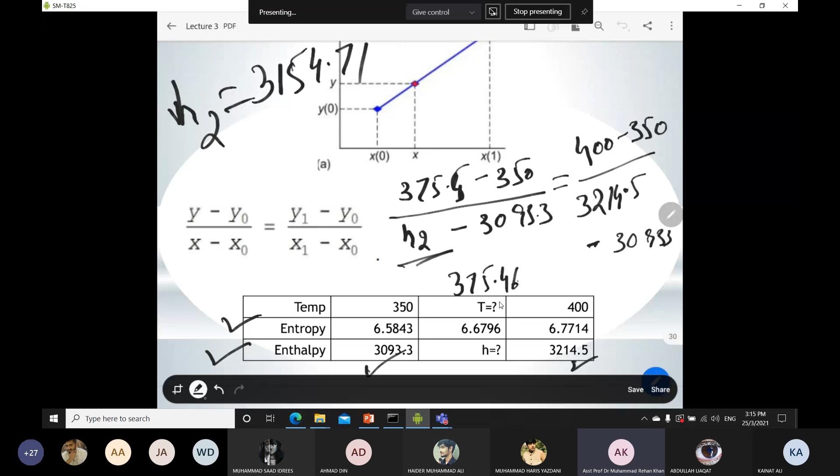Okay, so now we will see that in the previous slide, h4 is 3155.0. So this is how you can find h4 and t4 by using linear interpolation.

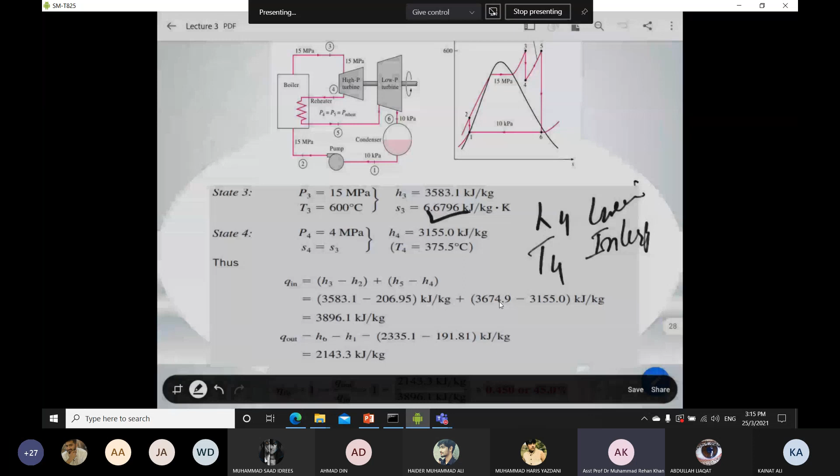So you already have to revise it. You can just go and revise your mathematics knowledge on how to apply linear interpolation for 3 points.

Now coming towards our main thing, we have to find the thermal efficiency for the reheat cycle. So we need Q in for this. We already know there will be two heat addition processes, one between 3 and 2, and one between 5 and 4.

So we need enthalpy value at state number 3, enthalpy value at state number 2, enthalpy value at state number 5, and enthalpy at state number 4. That is your Q in value. Just plug in all the values, because you already found all the values in previous states, and you can get the Q in.

Again for Q out, Q out is in condenser 1. So this is your Q out: Q equals H6 minus H1. You can just plug in the H6 value and H1 value, and you can find the value of Q out as well.

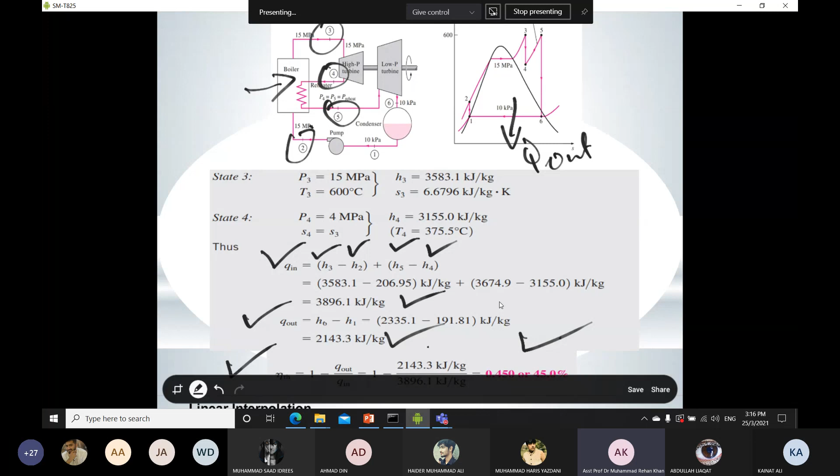To find the thermal efficiency, you just need 1 minus Q out over Q in, and you can find the thermal efficiency of your whole reheat cycle in this way. So this is the approach we have to use in order to find the enthalpy value and the thermal efficiency for the reheat Rankine cycle.

Okay, so any question till this point? I hope there will be no question, and it is an easy one also.

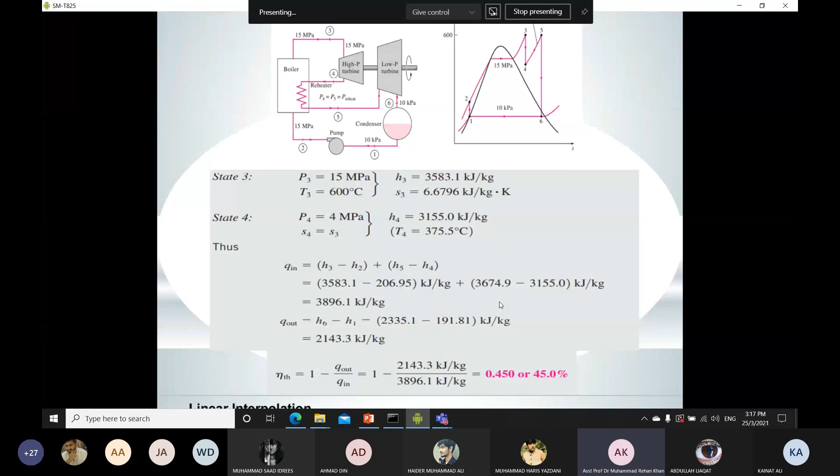So what you have to do is note down this question and first read the statement, because you have to do it by yourself. A steam power plant operates on the ideal reheat Rankine cycle. Steam enters the high pressure turbine at 8 megapascal and 500 degrees Celsius.

Again, the pressure at state 3 is given to you, leaving at 3 megapascal. One thing which is different from the previous one: previously you had to find P4 or P5, but now P4 and P5 are given in the question as well.

Steam is then reheated at constant pressure to 500 degrees C before it expands to 20 kilopascal, so this pressure is also given to you, and the temperature is also mentioned. Determine the low pressure turbine work output and the thermal efficiency of the cycle, and also show the cycle on a TS diagram.

So this one is also an easy one. All the state points are given to you, the information that is P4 and temperature is given to you. You have to find the enthalpy value at all the states and plug in all the values into the efficiency equation, and you can find the thermal efficiency of the cycle.